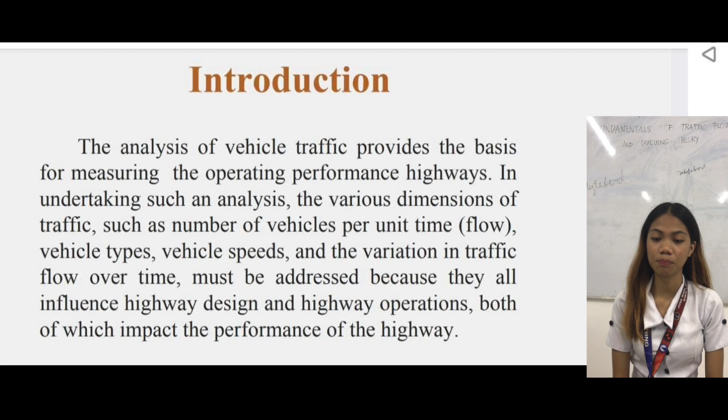So the analysis of vehicle traffic provides the basis for measuring the operating performance of highways. In undertaking such an analysis, the various dimensions of traffic such as number of vehicles per unit time (flow), vehicle types, vehicle speeds, and the variation in traffic flow over time must be addressed because they all influence highway design and highway operations, both of which impact the performance of the highway.

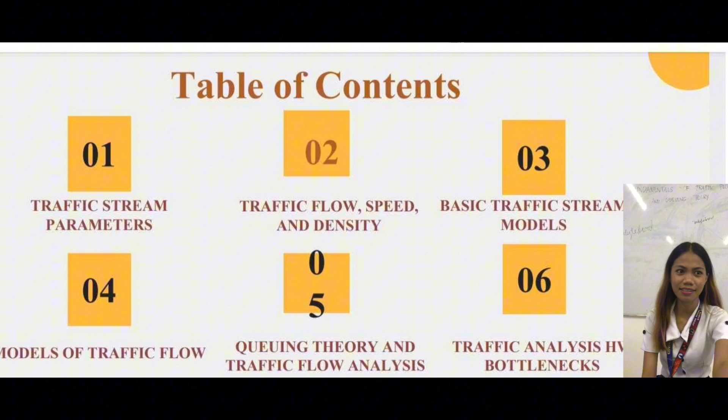Table of contents. 1 is the traffic stream parameters, 2 traffic flow, speed and density, 3 basic traffic stream models, 4 models of traffic flow, 5 is the queuing theory and traffic flow analysis, and 6 is the traffic analysis at highway bottlenecks. First is the traffic stream parameters.

So traffic stream parameters can be characterized by a number of different operational performance measures. A traffic stream that operates free from the influence of such traffic control devices as signals and stop signs is classified as uninterrupted flow. This type of traffic flow is influenced primarily by roadway characteristics and the interactions of the vehicles in the traffic stream.

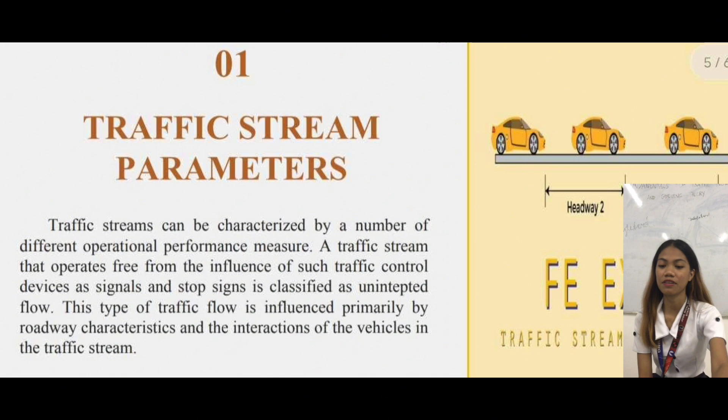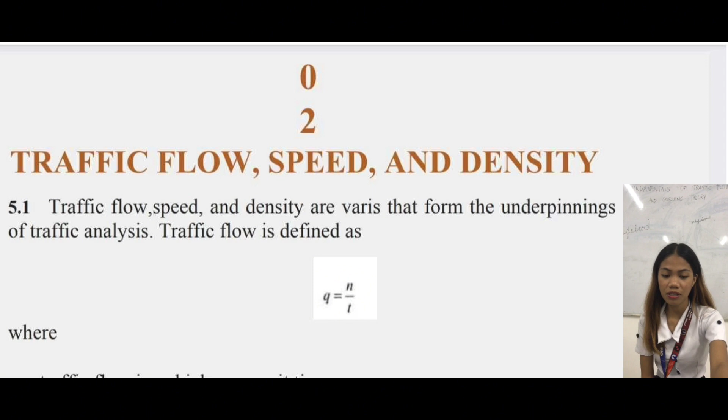2 is the traffic flow, speed and density. Traffic flow, speed and density are variables that form the underpinnings of traffic analysis. Traffic flow is defined as Q = N / T, where Q is traffic flow in vehicles per unit time, N is the number of vehicles passing some designated roadway point during time T, and T is the duration of the time interval.

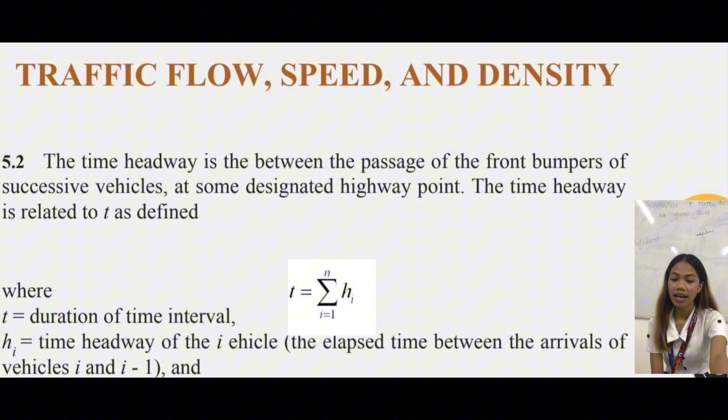The time headway is the time between the passage of the front bumpers of successive vehicles at some designated highway point. The time headway is related to T as defined: T is equal to the summation from i = 1 to N of h sub i, where T is the duration of the time interval, h sub i is the time headway of the i-th vehicle, the elapsed time between the arrivals of vehicles i and i minus 1, and N is the number of measured vehicle time headways at some designated roadway point.

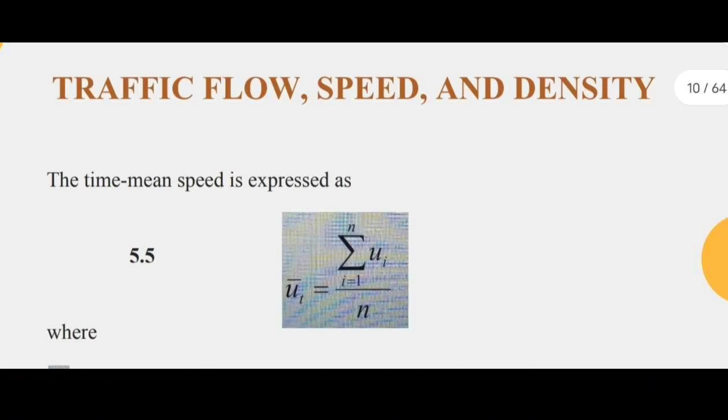Traffic stream models attempt to establish a better relationship between the traffic parameters. It is essential to understand the interaction of the individual microscopic measures in order to fully analyze the operational performance of the traffic stream. Speed density model. So the most intuitive starting point for developing a consistent, generalized traffic model is to focus on the relationship between speed and density. On a section of highway with only one single vehicle on it, the density will be very low, and the driver will be able to travel freely at a speed close to the design speed of the highway.

So this speed is referred to as the free flow speed because vehicle speed is not inhibited by the presence of other vehicles. As more and more vehicles begin to use a section of highway, the traffic density will increase and the average operating speed of vehicles will decline from the free flow value as drivers slow to allow for the maneuvers of other vehicles. Eventually, the highway section becomes congested, leading to a jam density. So the density is determined by vehicle length and driver space, with the jam density being the highest density condition. This occurs when traffic stops, u = 0.

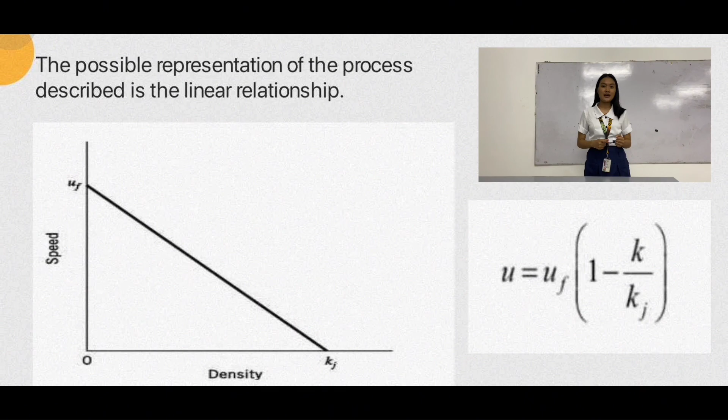The possible representation of the process described is the linear relationship. As you can see in the picture, there is an illustration of a typical linear speed density relationship. So this relationship can be expressed as u = u_f (1 - k / k_j), where u is the space mean speed in miles per hour, u_f is the free flow speed in miles per hour, k is the density in vehicles per mile, and k_j is the jam density in vehicles per mile.

So the overall speed density relationship is better represented by three relationships. Number 1, a non-linear relationship at low density that has speed slowly declining from the free flow value. Number 2, a linear relationship over the large medium density region. Number 3, a non-linear relationship near the jam density as the speed asymptotically approaches zero with increasing density. Density is the number of vehicles occupying a unit length of the lane of the roadway at a given instant. It is expressed in vehicles per kilometer.

Then we can obtain a formula of q = u_f(k − k²/k_j). The maximum flow rate, q_cap, represents the highest rate of traffic flow that the highway is capable of handling. This is referred to as the traffic flow at capacity, or simply the capacity of the roadway. The traffic density that corresponds to this capacity flow rate is k_cap and the corresponding speed is u_cap.

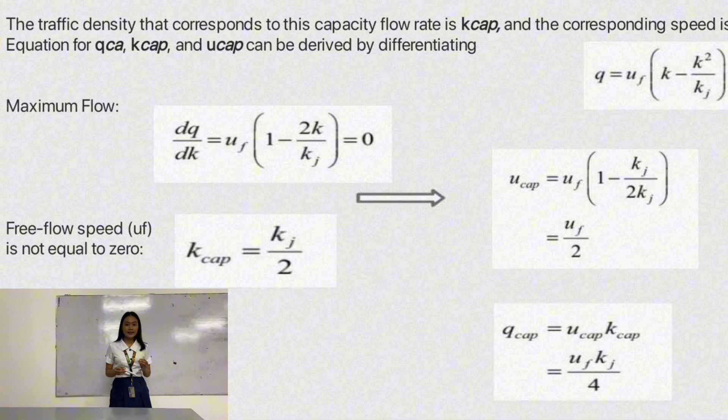Equations for q_cap, k_cap and u_cap can be derived from differentiating q = u_f(k − k²/k_j). So as you can see on the screen, we have the maximum flow and the free flow speed u_f, which is not equal to 0. So after we substitute these formulas, we can obtain the general formula q_cap = u_cap × k_cap, or q_cap = u_f × k_j / 4.

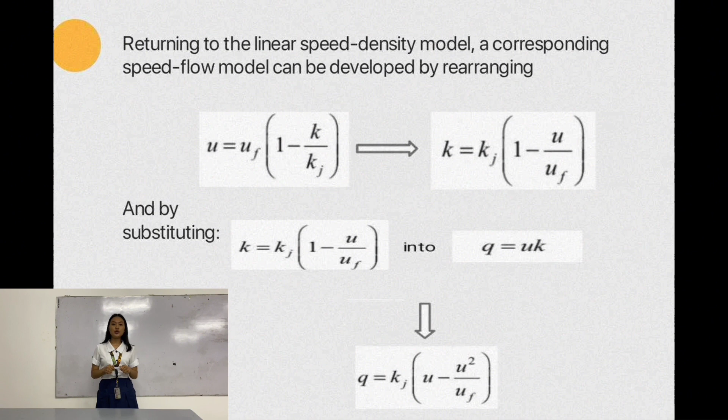Returning to the linear speed-density model, a corresponding speed-flow model can be developed by rearranging u = u_f(1 − k/k_j) to k = k_j(1 − u/u_f). And by substituting these two formulas, we can obtain the general formula, which is q = k_j(u − u²/u_f).

So let us proceed to our next topic, which is about models of traffic flow. Traffic flow, speed and density are related, but attention now shifts to a more microscopic view of traffic flow. This involves modeling the time between successive vehicle arrivals, known as vehicle headway. Models for non-uniform flow assume vehicle arrival patterns are random processes, requiring selecting a probability distribution that accurately represents observed traffic arrival patterns.

An observer counts 360 vehicles per hour at a specific highway location. Assuming that the arrival of vehicles at this highway location is Poisson distributed, estimate the probabilities of having 0, 1, 2, 3, 4, and 5 or more vehicles arriving over a 20-second time interval. So the solution: the average arrival rate, λ, is 360 vehicles per hour or 0.1 vehicles per second.

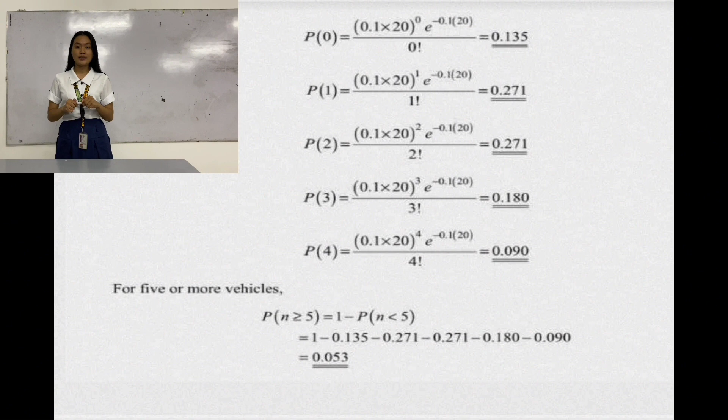When n = 1, P(1) = (0.1 × 20)^1 × e^(−0.1 × 20) / 1!, so it is equal to 0.271. When n = 2, P(2) = (0.1 × 20)^2 × e^(−0.1 × 20) / 2!. Then we have an answer of 0.271.

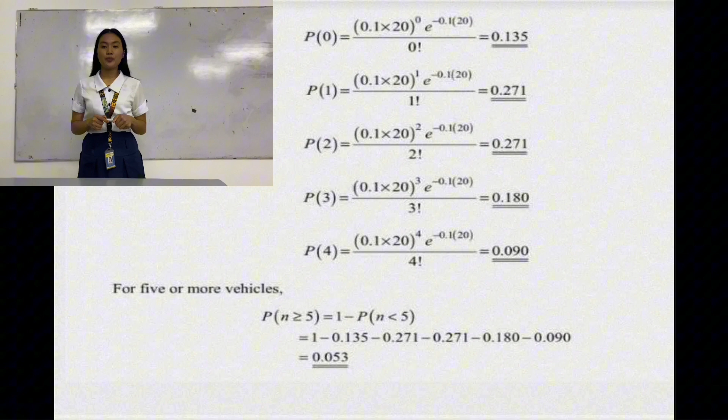When n = 3, P(3) = (0.1 × 20)^3 × e^(−0.1 × 20) / 3! = 0.180. Then, when n = 4, P(4) = (0.1 × 20)^4 × e^(−0.1 × 20) / 4!. It is equal to 0.090.

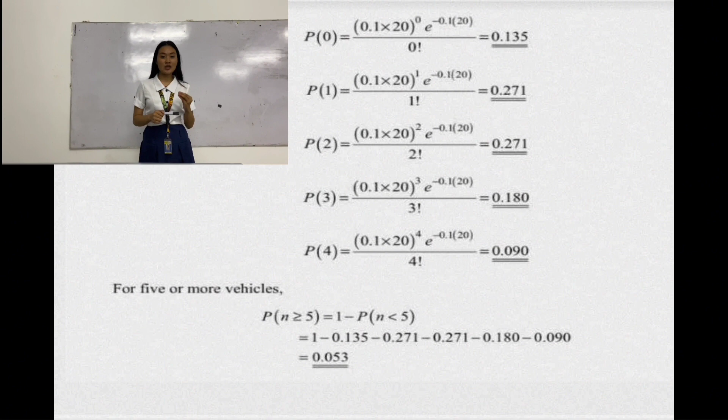For 5 or more vehicles, P(n ≥ 5) = 1 − P(n < 5). It is equal to 1 − 0.135 − 0.271 − 0.271 − 0.180 − 0.090.

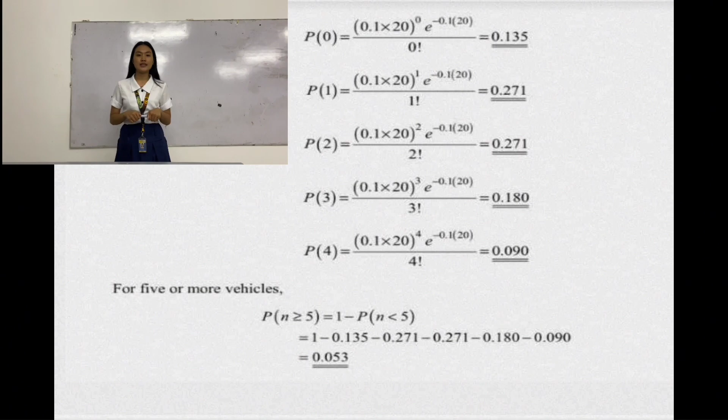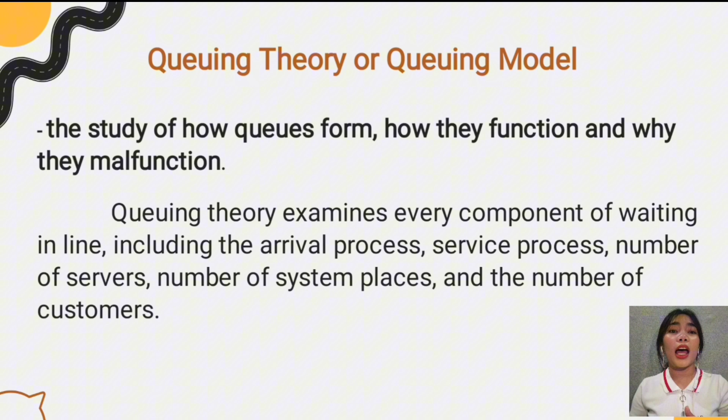What is traffic flow analysis? It is a study of interactions between travelers and infrastructure. It seeks to describe in a precise mathematical way the interaction among vehicles, drivers, and the infrastructure. The infrastructure consists of the highway system and all its operational elements, including control devices, signage, and markings.

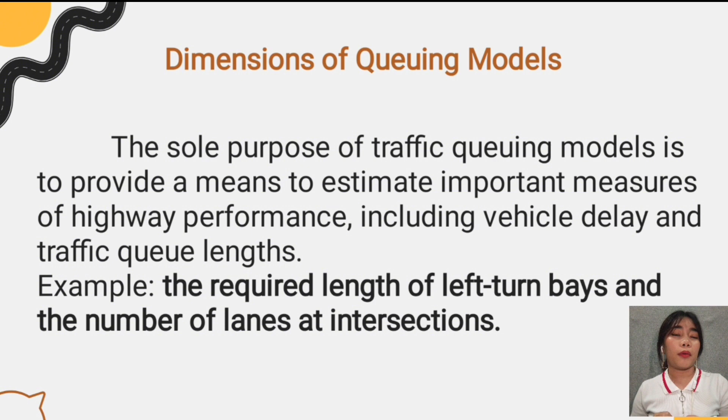Next, queuing models are derived from underlying assumptions regarding arrival patterns, departure characteristics, and queue disciplines. Lambda, or the average vehicle arrival rate. Two possible distributions of the time between the arrival of successive vehicles were considered. First, equal time intervals derived from the assumption of uniform deterministic arrivals. Secondly, exponentially distributed time intervals derived from the assumption of Poisson distributed arrivals.

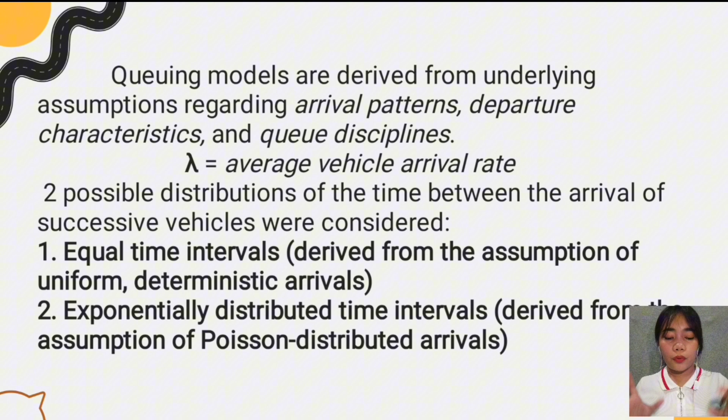In addition to vehicle arrival assumptions, the derivation of traffic queuing models requires assumptions relating to vehicle departure characteristics. Of particular interest is the distribution of the amount of time it takes a vehicle to depart. For example, the time to pass through an intersection at the beginning of a green signal, or the time a driver takes before deciding to proceed after stopping at a stop sign.

As was the case for arrival patterns, given an average vehicle departure rate denoted as mu in vehicles per unit time, the assumption of the deterministic or exponential distribution of the departure times is appropriate. An example is the time to pass through an intersection at the beginning of a green signal, or the time a driver takes before deciding to proceed after stopping at a stop sign.

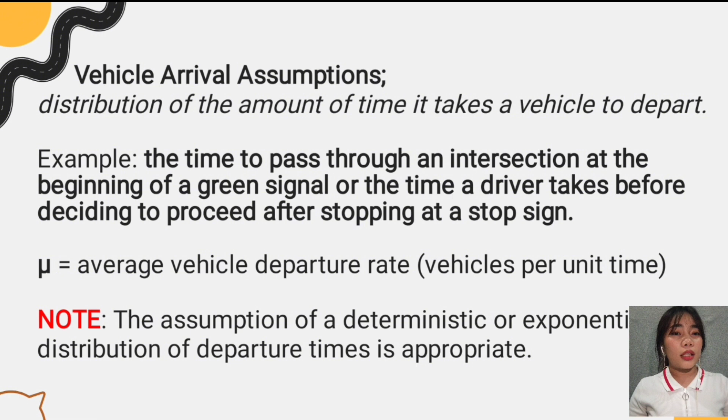Important aspects of queuing models: the number of available departure channels. For most traffic applications, only one departure channel will exist, such as a highway lane or group of lanes passing through an intersection. However, multiple departure channels are encountered in some traffic applications, such as at toll booths on turnpikes and at entrances to bridges.

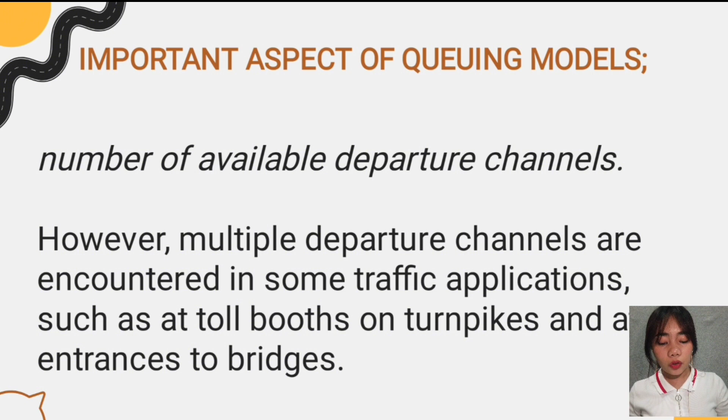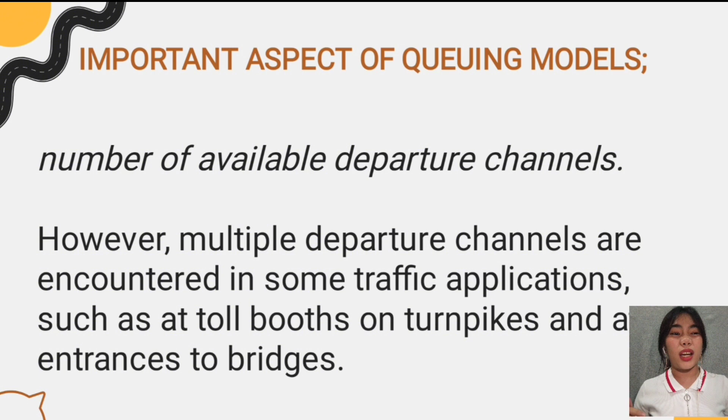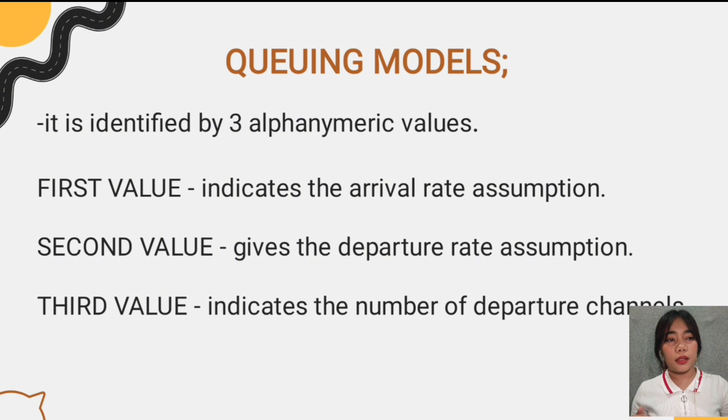So next is traffic arrival and departure assumption. D is for deterministic distribution and the M is exponential distribution. D/D/1 queuing model: it is the deterministic arrival, departure with one departure channel. Then M/D/1 queuing model: it is exponentially distributed arrival times, then deterministic departure times, and one departure channel.

So D/D/1 queuing. The case of deterministic arrivals and departures with one departure channel. D/D/1 queue is an excellent starting point in understanding queuing models because of its simplicity.

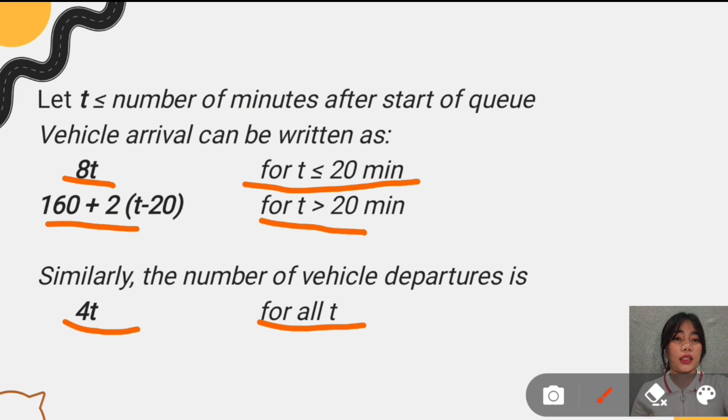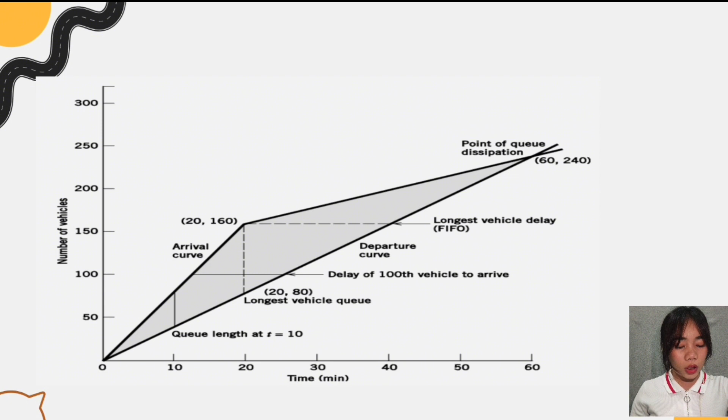When the arrival curve is above the departure curve, a queue condition exists. The point at which the arrival curve meets the departure curve is the moment when the queue dissipates. No more queue exists. In this example, the point of queue dissipation can be determined graphically by inspection or analytically by equating the appropriate arrival and departure equations, that is 160 plus 2 times (t minus 20) equals 4t. Solving for t gives t equals 60 minutes.

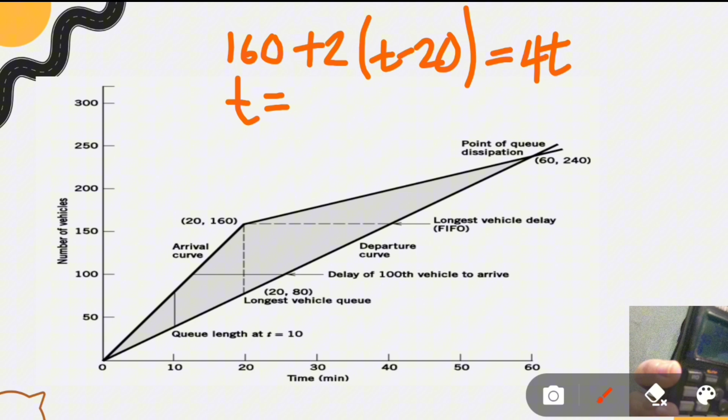160 plus 2 times (t minus 20). We are looking for t, which is 60 minutes. So t equals 60 minutes. Thus, the queue that began to form at 8 a.m. will dissipate 60 minutes later, at 9 a.m., at which time 240 vehicles have arrived, from 4 vehicles per minute times 60 minutes.

Another aspect of interest is individual vehicle delay under the assumption of a FIFO queuing discipline. The delay of an individual vehicle is given by the horizontal distance between arrival and departure curves starting from the time of the vehicle's arrival in the queue. So by inspection, the 160th vehicle to arrive will have the longest delay, 20 minutes, and vehicles arriving after the 240th vehicle will encounter no queue delay because the queue will have dissipated and the departure rate will continue to exceed the arrival rate.

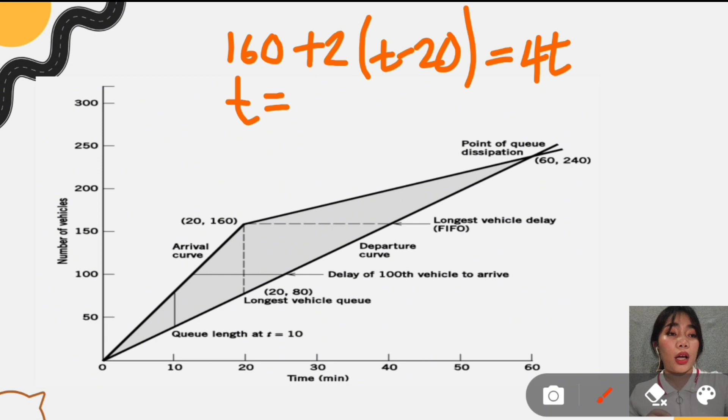Total vehicle delay, defined as the summation of the delays for the individual vehicles, is given by the total area between the arrival and departure curves, and in this case is in units of vehicle-minutes. In this example, the area between the arrival and departure curves can be determined by summing triangular areas, giving the total delay.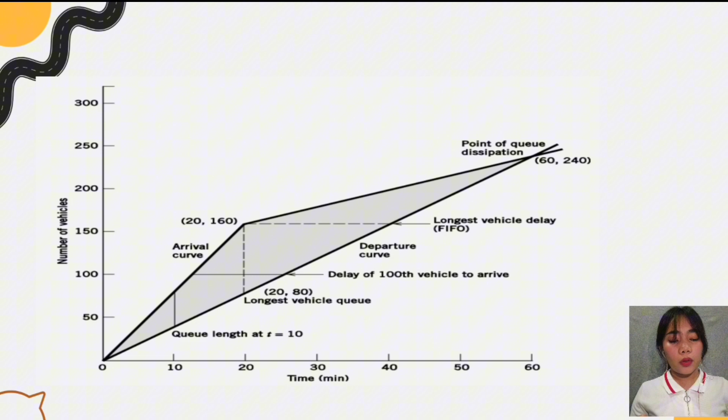DT is equals to 1/2 times 80 times 20, plus 1/2 times 80 times 40, which gives a total of 2,400 vehicle-minutes. Finally, because 240 vehicles encounter queuing delay as previously determined, the average delay per vehicle is 10 minutes.

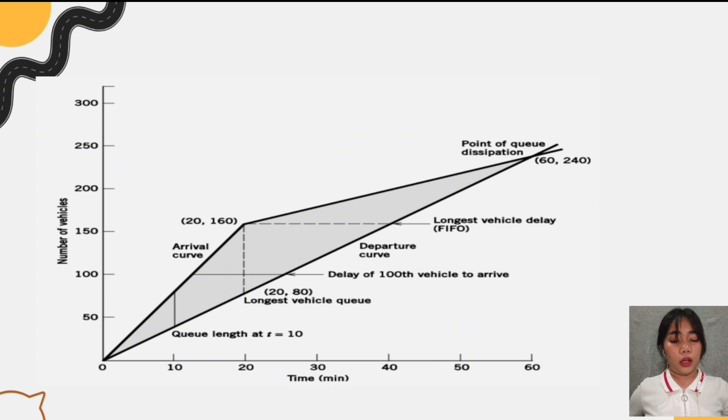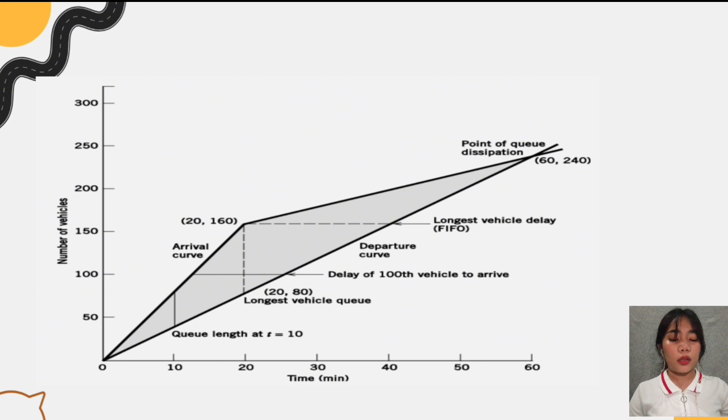Or 2,400 vehicle-minutes divided by 240 vehicles. And the average queue length is 40 vehicles, or 2,400 vehicle-minutes over 60 minutes.

So let's review. What is the total time of delay by all vehicles? We got DT is equals to 1/2 times 80 times 20 plus 1/2 times 80 times 40. So the total is 2,400 vehicle-minutes.

What is the average delay per vehicle? 2,400 vehicle-minutes divided by 240 vehicles gives 10 minutes per vehicle. This next one is the average queue length.

So what is the average queue length per vehicle? 2,400 vehicle-minutes over 60 minutes is equals to 40 vehicles. So that will be the end of my discussion.

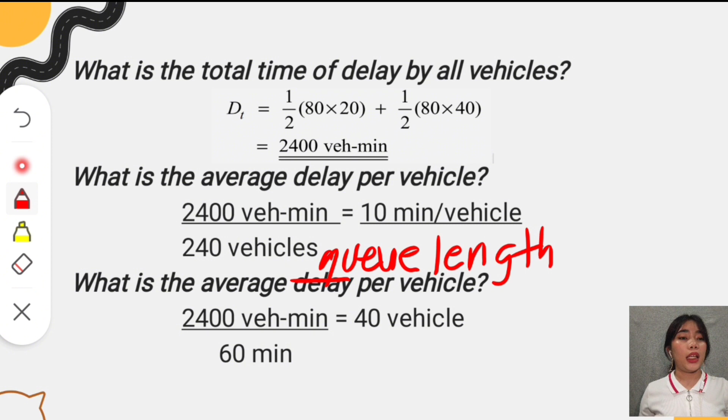MD1 queuing: the assumption of exponentially distributed times between the arrivals of successive vehicles, or Poisson arrivals, will in some cases give a more realistic representation of traffic flow than the assumption of uniformly distributed arrival times.

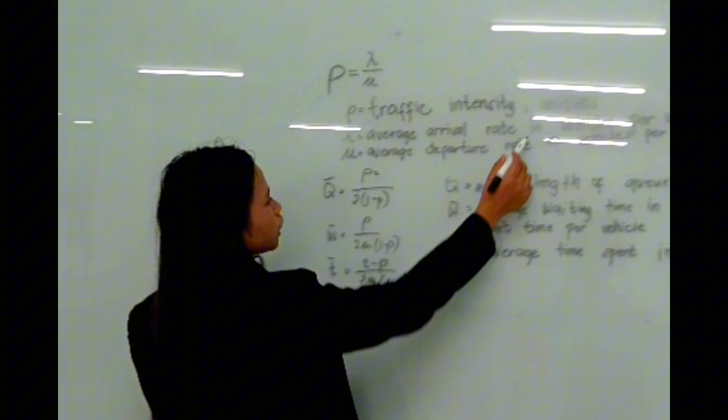So we have this formula, traffic intensity. Traffic intensity is equals to the average arrival rate in vehicles per unit time over the average departure rate in vehicles per unit time.

So for example, we have the problem: Consider the entrance of the recreational park described in example 5.7. However, let the average arrival rate be 180 vehicles per hour, Poisson distributed with exponential times between the arrivals, over the entire period from park opening time 8 a.m. until closing at dusk. Compute the average length of the queue, average waiting time in the queue, and the average time spent in the system.

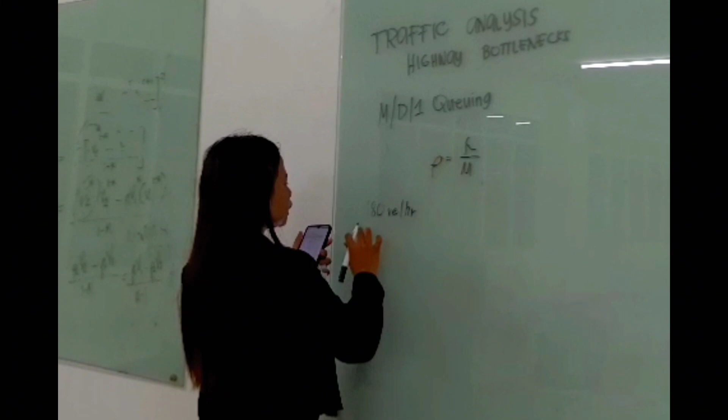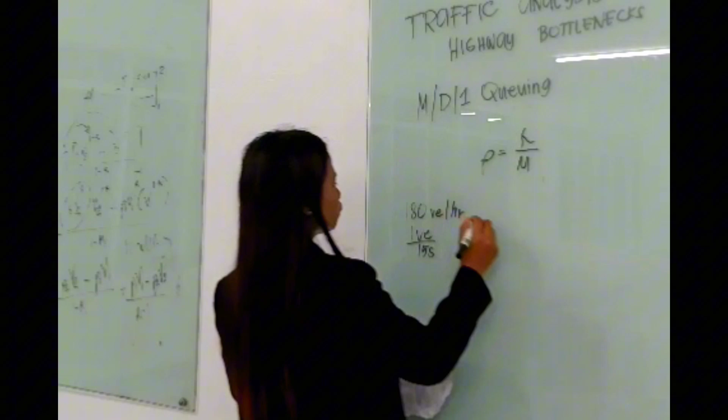So first, we will solve for the traffic intensity using the formula. Given is 180 vehicles per hour. But as stated in example 5.7, it's given that the interval for one vehicle is like 15 seconds. So we convert this into minutes: 180 vehicles per hour times 1 hour over 60 is equals to 3.

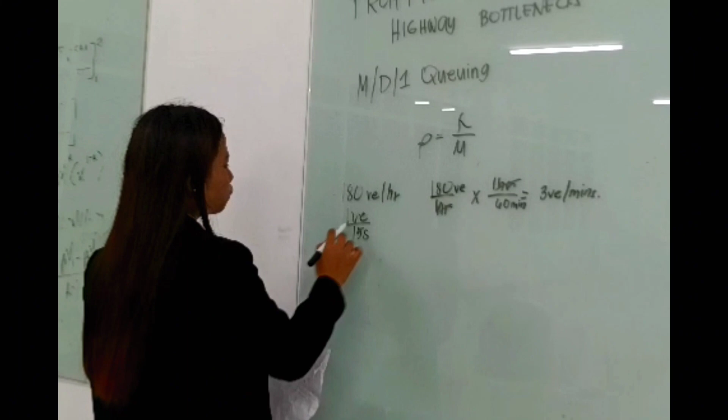3 vehicles per minute. So the 1 vehicle per 15 seconds, I convert this to vehicles per minute so it's the same unit. So we have 1 vehicle over 15 seconds times 60 seconds over 1 minute, giving us 4 vehicles per minute.

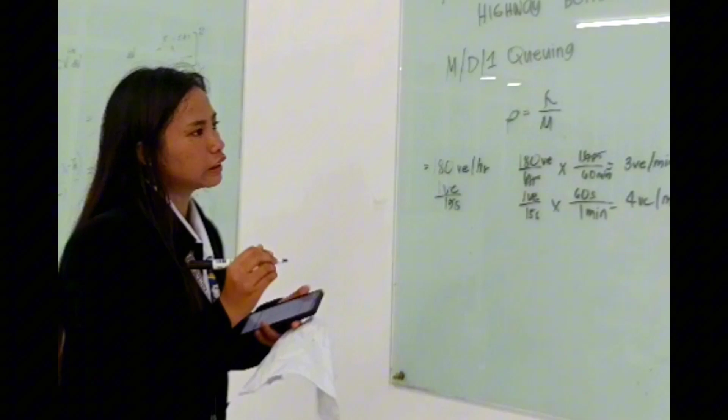So this is what we call the average arrival rate according to the problem, and this other one is the average departure rate. Using these two values, we can compute the traffic intensity. So ρ is equals to 3 vehicles per minute over 4 vehicles per minute, giving us 0.75. So that is our traffic intensity.

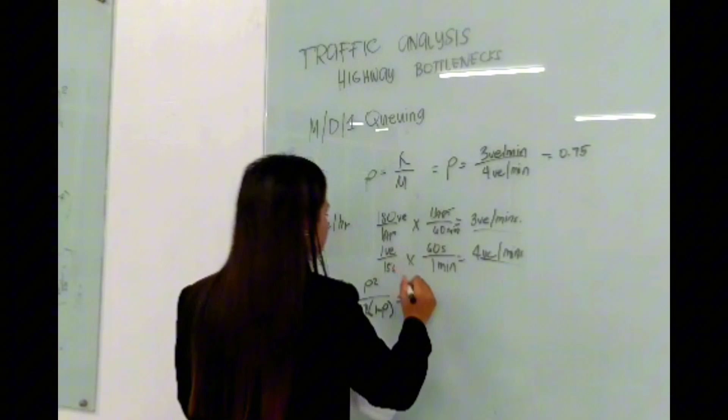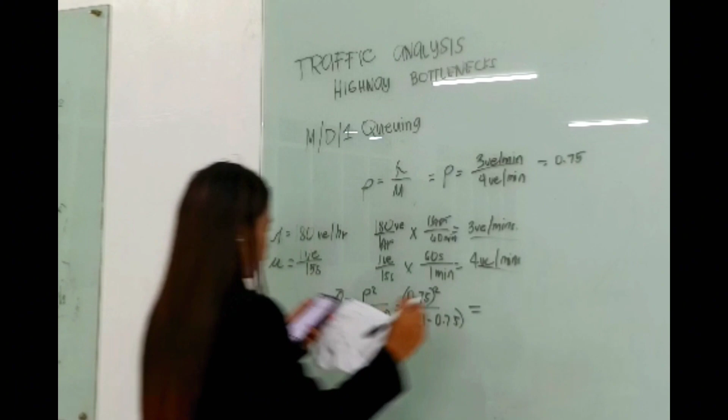So the next question is the average length of the queuing vehicles. We have the formula: traffic intensity squared over 2 times 1 minus traffic intensity. So Q is equals to ρ squared over 2 times 1 minus ρ. Substituting, which is 0.75 squared over 2 times 1 minus 0.75, we have 1.125. So that is our average length of queuing vehicles.

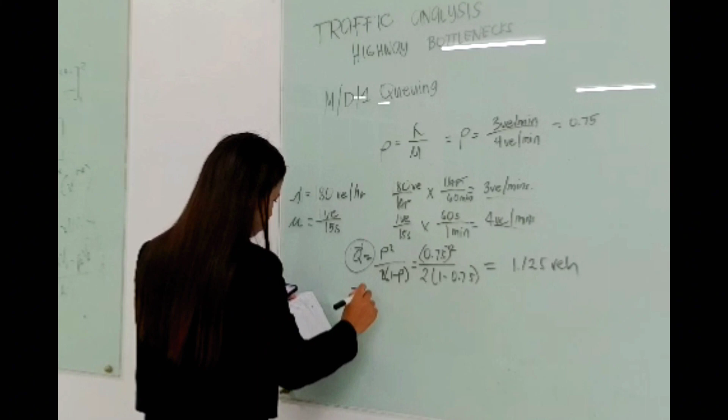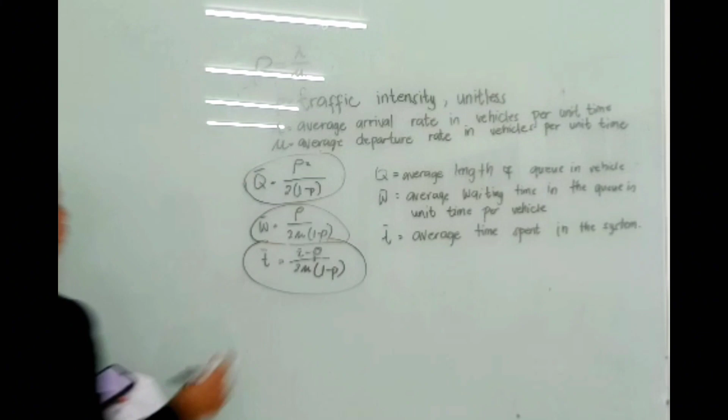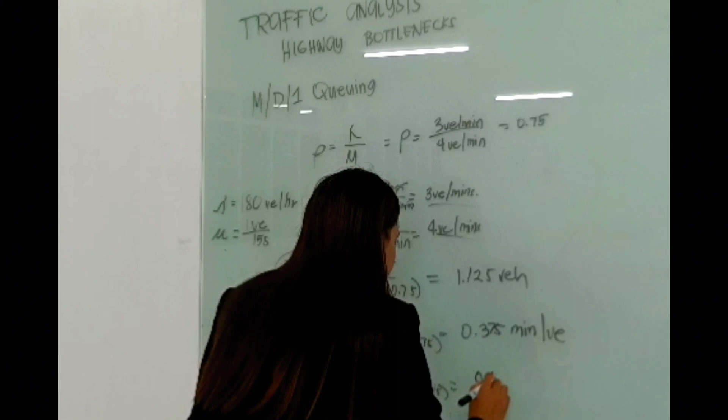Next is the average waiting time in the queue. The formula is traffic intensity over 2 times average departure rate times 1 minus the traffic intensity. So to find W, we compute and get 0.375 minutes per vehicle. So that's it for M/D/1 queuing.

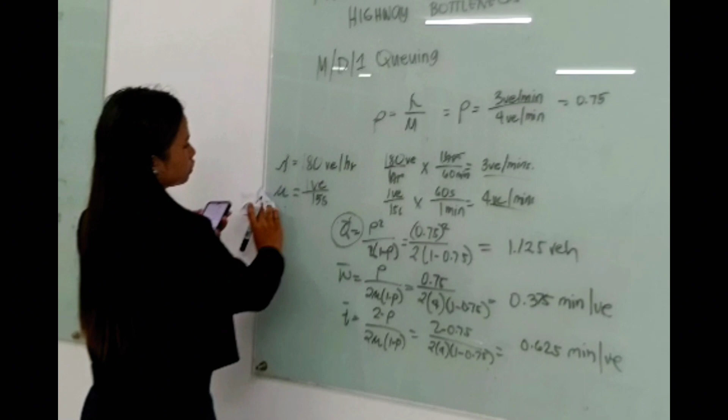MM1 queuing, same problem. Four or three.

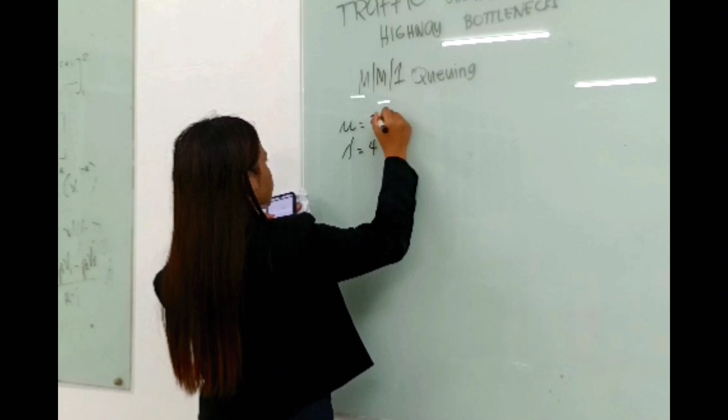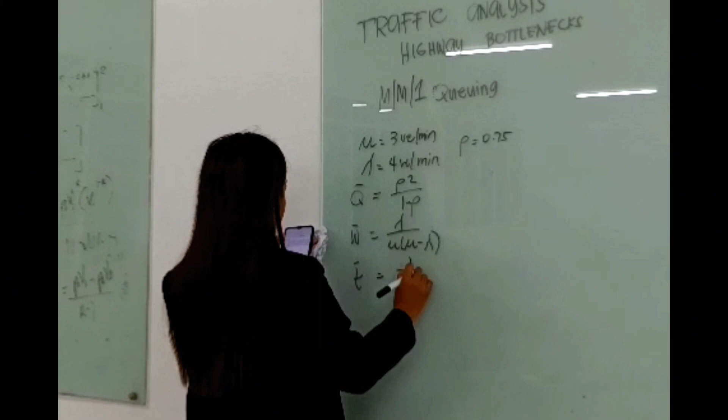P is 0.75. So the formula for average length of the queuing vehicle, Q equals P squared over 1 minus traffic density. Then for the average waiting time, using the formula from before. And the average time spent in the system is 1 over average departure rate minus average arrival rate, using the same formula as before.

Using the MM1Q, same problem. The value of the average length of the queue equals 0.75 squared over 1 minus 0.75, which equals 2.25 vehicles. For this one, the value is 4.

So this one is 3 over 4 times 4 minus 3, so we have 0.75 minutes per vehicle. Next, the average time spent equals 1 over 4 minus 3, which equals 1 minute per vehicle.

Next is the MMN queuing, toll bridge application.

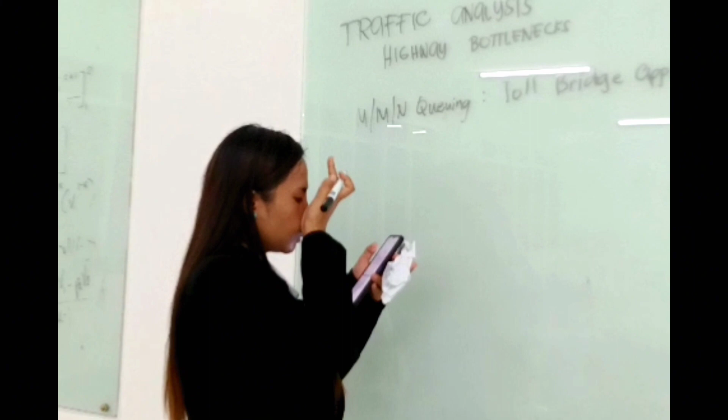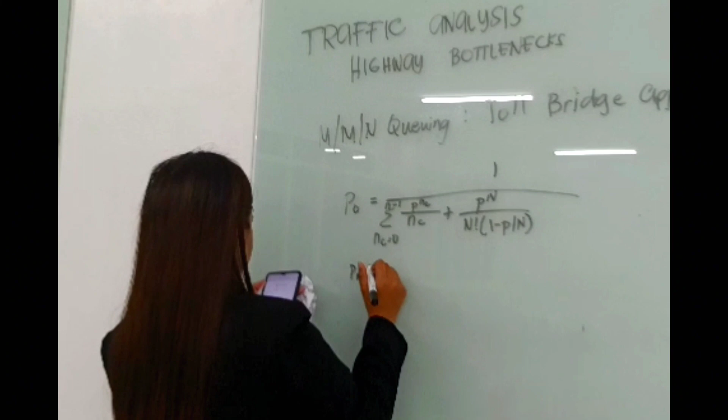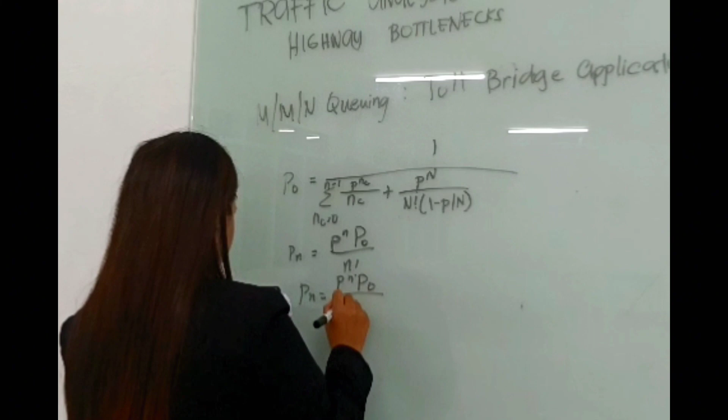Given the formula, P0 equals 1 over the summation, with C factorial. Another formula, this one is for n less than or equal to N.

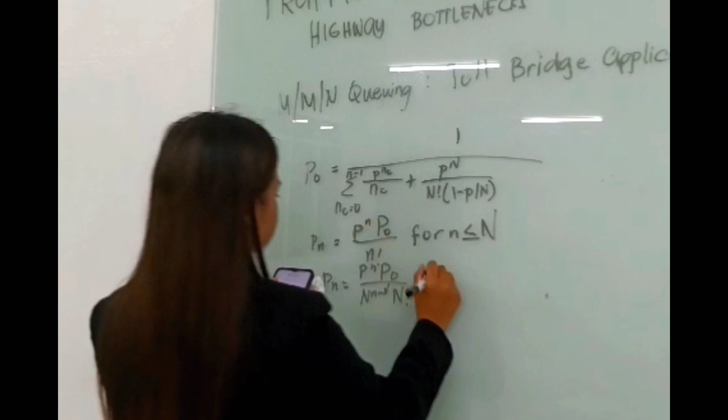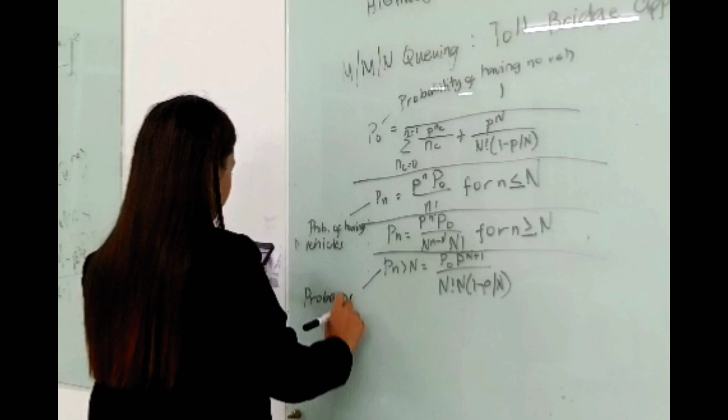In this formula, P0 is the probability of having no vehicles in the system, where Pn is the probability of having n vehicles in the system, and P(n greater than N) is the probability of waiting in the queue. The small letter n stands for the number of vehicles in the system, and the big letter N stands for the number of departure channels. N sub C stands for the departure channel number, and P is the traffic intensity.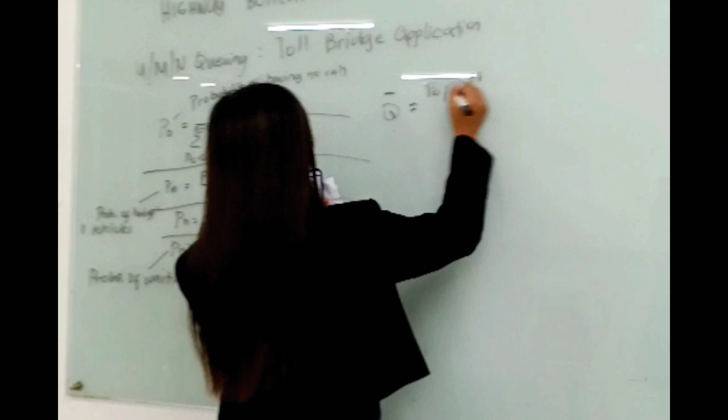For the average length, the formula is P0, which is the probability of having no vehicle, times traffic intensity, to the power of number of departure channels plus 1, over number of departure channels factorial, times 1 over 1 minus traffic intensity over N, squared.

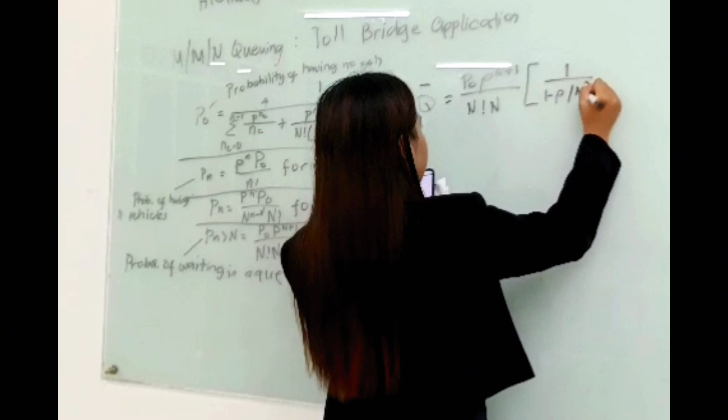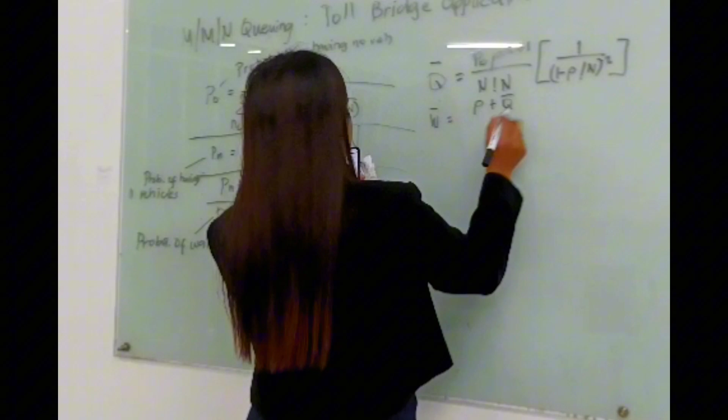Then for the average waiting time, traffic intensity plus the average length over the arrival rate minus 1 over departure rate. For the average time spent, we have traffic intensity plus average length, all over arrival rate. So for example...

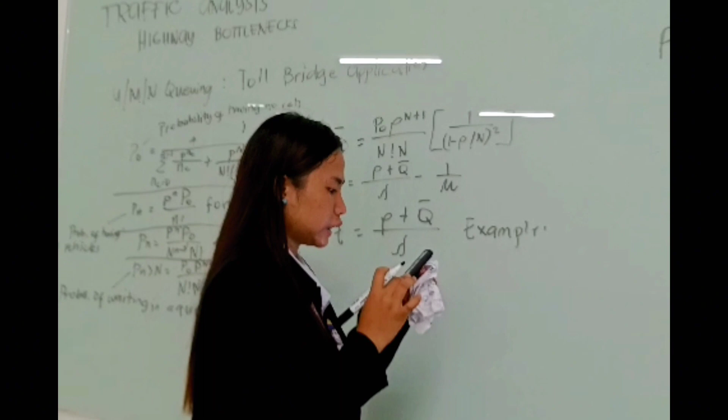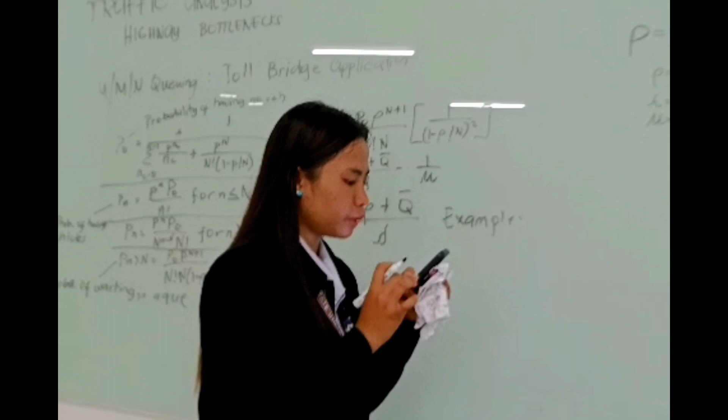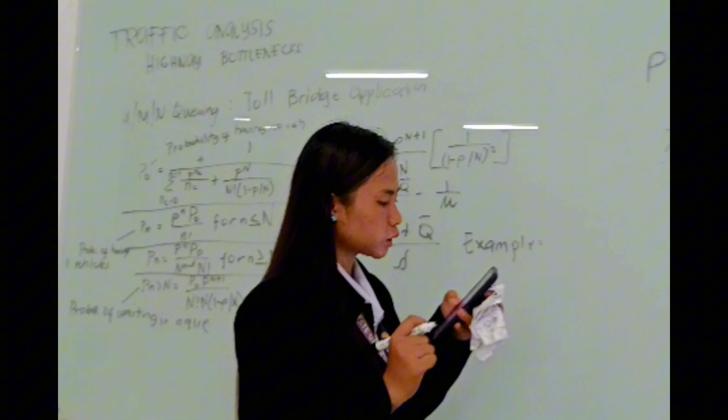Example: a convenience store has 4 available parking spaces. The owner predicts that the duration of customer shopping, the time that a customer's vehicle will occupy a parking space, is exponentially distributed with a mean of 6 minutes. The owner knows that in the busiest hour, customer arrivals are exponentially distributed with a mean arrival rate of 20 customers per hour. What is the probability that a customer will not find an open parking space?

Putting mean arrival and departure rates in common units gives departure rate equals 10 vehicles per hour, and arrival rate equals 20 vehicles per hour. So the value of P (traffic intensity) is equal to 2 vehicles.

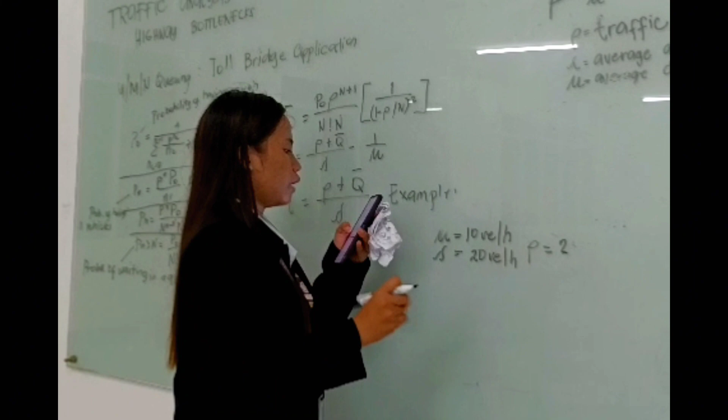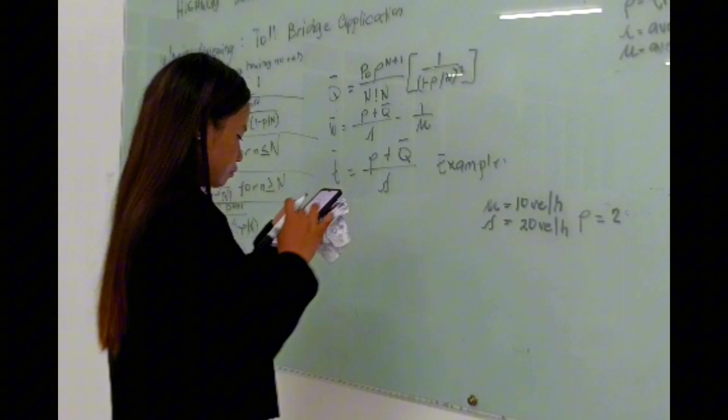Because P over N is 0.5, which is less than 1, we can use this equation. What we need to find in this problem is the probability that the customer will not find an open parking space. So the formula: P0 equals 1 over...

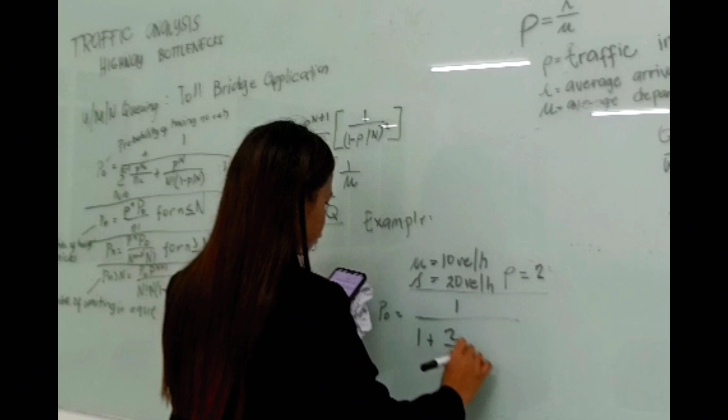1 factorial, 2 squared, 2 factorial, plus 2, up to 4 since 4 is the number of available spaces given in the problem. The 0.5 here is P over N, that is, traffic intensity. Traffic intensity is 2, and N, the big letter N which is the number of departure channels, is 4. So 2 divided by 4 gives us 0.5.

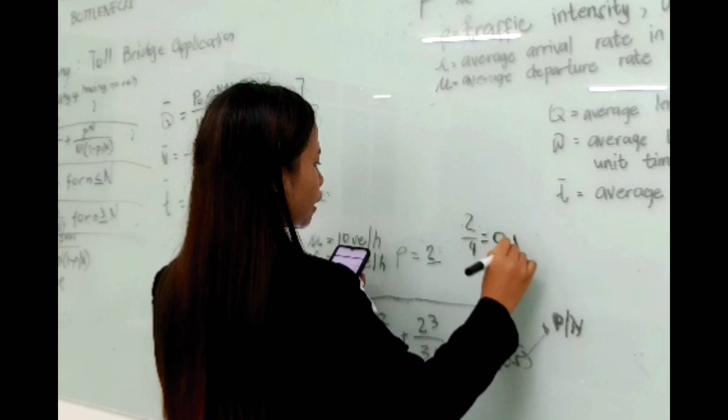So P0, when calculated, is 0.1304. Thus the probability of not finding an open space upon arrival is...

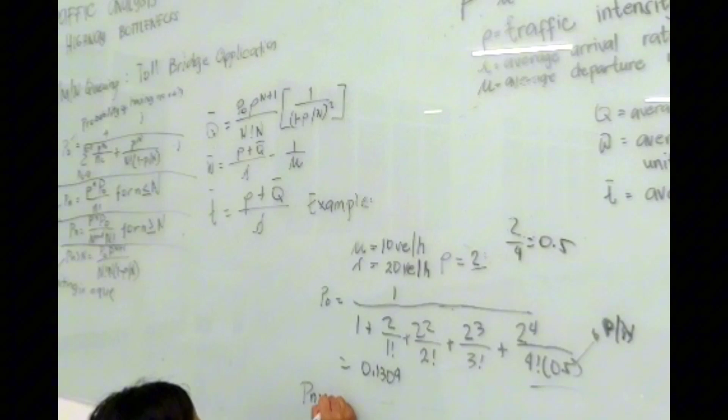So the final answer is 0.087. That's it for M/M/N.